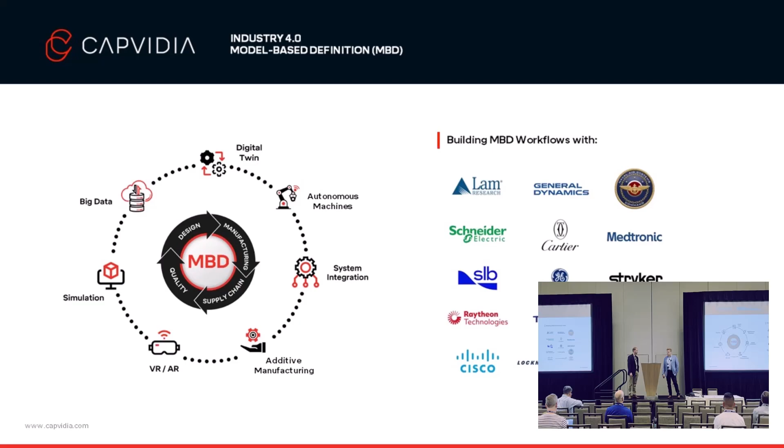So I wanted to start with level setting on some terminology. Again, you heard some of these terms if you were in the prior session, but I think it's good to make sure we're all on the same understanding of what we're talking about here for terms. So we got a model-based definition data set on the right, and we're talking about characteristic accountability. So first, what is a product characteristic? It's a trait, a quality, or an attribute on an element of a feature, and it can describe the size, the location, the form, or some property of that feature.

So on our example part on the right here, our machine block with 4 holes, the product characteristics that we're going to focus on are a feature of size characteristic for all 4 holes, and then a true position on the pattern of 4 holes. And product characteristic tags, so these are human or machine readable tags that are applied to the product characteristics. So for this part, I know the numbers are hard to read, but the feature of size is number 3, attached to that PMI element, and then the true position of the pattern of 4 holes is number 4.

So because it is a pattern of instances, there's a parent ID that's attached to the PMI instance, and then there's instance tags that are applied to each of the 4 holes. So in characteristic accountability, we need to account for the characteristics. So we got to go further than just putting an ID on the parent and assuming somebody's going to figure out which hole is which hole. We've got to characterize each instance so that we can trace them.

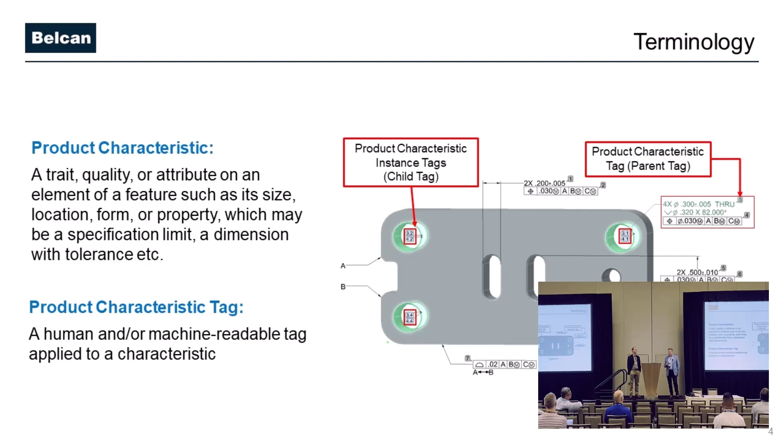Then the next term is a bill of characteristics. So this is a list of all of the product requirements, in this case in an Excel format or a tabulated format. And if we walk through the example of what's included typically in a bill of characteristics, you've got the characteristic IDs or the tags. You have the presentation state, or in NX, that's your model views where those IDs are present. The measurement object, so for that pattern of 4 holes, the measurement object is the cylinder.

The PMI, which in this case is primarily GD&T. We're also referencing the datums and reference frames for that GD&T. We've also got the concept of a UUID, or a universal unique identifier. Those can be applied at the characteristic tag level, and you can also call the bill of characteristics with its own unique ID.

And then finally, what we're here to talk about, characteristic accountability. So that's ensuring all of your product characteristics, the requirements attached to those product characteristics, have been met with traceability through verification results, right? We want that full cycle of assigning the characteristics, mapping them through the manufacturing and inspection process, and then being able to map the results back onto the same characteristics.

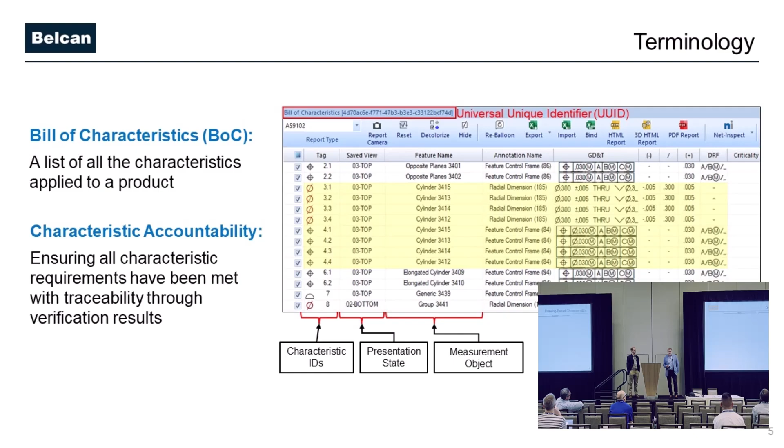All right, so next I'm going to talk about what does characteristic accountability look like today in a drawing-based environment. So if you look at the image on the top of the diagram, I'm going to build out a workflow. On the left-hand side are major process steps that are done by the OEM, and then on the right-hand side are the steps that would be done by a supplier or multiple suppliers.

So we'll start, of course, with creating our 2D drawing. We're going to assign 2D specs. So examples could be weld specifications, heat treat specifications, where the 2D drawing will have a call out, weld per specification, and then you have a stack of specifications that have the actual weld requirements. We'll combine both of those data sets and then issue that product definition to the supplier.

And then what the supplier is going to do as an initial step is characterize the 2D drawing. And that's going to take the form of, you might hear the term ballooning a 2D drawing. Most people use circles with unique numbers inside the circle. And they're assigning a unique ID to every, in this case, 2D PMI instance. They're also going to have to characterize the 2D specs. So again, that can take the form of ballooning the 2D specs. So it's the supplier that is accounting for all the product characteristics in this workflow.

Then they'll take the 2D drawing, balloon characterization, and the 2D specs and combine them to create the bill of characteristics. And often in a 2D environment, that's going to take the form of like an Excel file where a human's extracted the data from the drawing and the specs and manually typed that into an Excel file. So I think the key thing here is the complete bill of characteristics is being created at the tail end of the process, and it's being done by the supplier in this workflow.

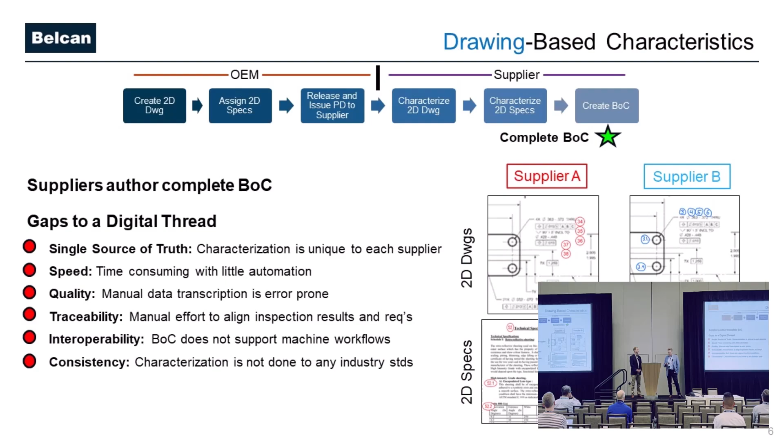So we saw what characterization looks like in a 2D drawing environment. We're gonna see what it could look like in model-based. And just to transition that conversation, this is how we talk about at Belcan the data elements that make up a model-based definition data set.

You've got the geometry, that's the shape definition. Annotations, which can be GD&T and notes. If you drop to the lower left, attributes and parameters, that's the metadata. That's behind the scenes on the PMI. Presentation states are model views in NX. That's where you're telling the story of the part across multiple model views.

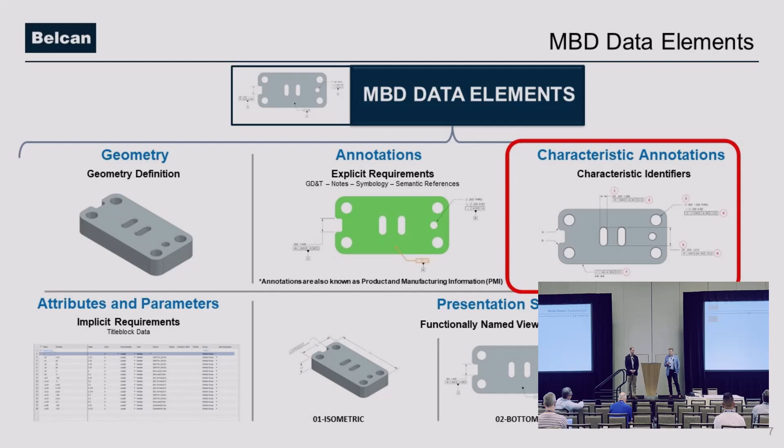And then we spike out characteristic annotations as a separate data element because there's so many workflows that can be driven off of it. All right, so same construct as two slides ago. Let's see what this workflow looks like with model-based characteristics. So instead of creating a drawing, we're going to create an MBD data set. We still have to assign 2D specifications, like those weld and heat treat callouts.

And then the red box is where we're going to see new process steps that are going to show up on the OEM side of the workflow here. So we'll start with characterizing the model-based definition. It's the same parent and instance IDs that I showed you on the previous slide. We have the opportunity to characterize the 2D specs in engineering. There's software available to complete that step. Capvidia is one of the providers in that space.

There's also the opportunity to merge the 2D characterization and the 3D data set to get a complete BOC as part of the engineering definition. We don't have details of that in this process, but Daniel and company, I'm sure, would be happy to show you what their software can provide for that workflow. And then lastly, we've got the opportunity to create a QIF file. That's our machine-readable format that's going to carry our characterization.

So we take all of that data now, authored by engineering, we release our data package to the supplier, and the ask to the supplier is that they reuse the OEM characterization. So now comparing to what we did in the drawing-based world, what happened here? We've moved that characterization to the left, made it part of the engineering definition, and it's a complete BOC authored by engineering.

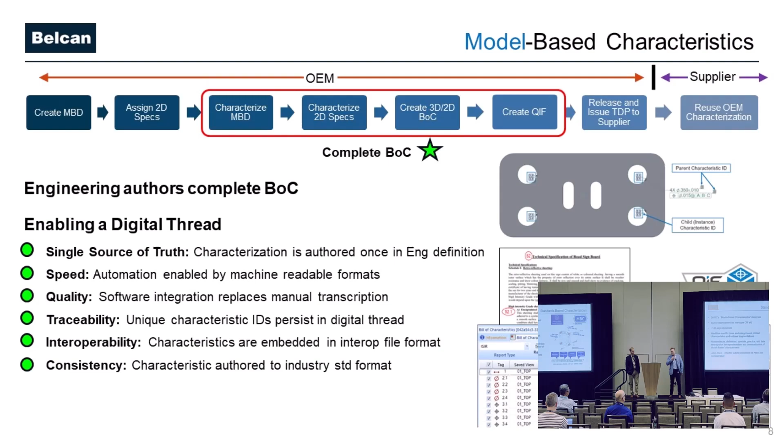I'll ask the same question here. Is anybody experimenting in this space of seeing what characterization could look like for MBD? Got some head nods, so there's some hope. Keep it alive. So I'll cover the first standard that's in this ecosystem, and it's an emerging standard. It was referenced in the prior presentation. The DMSC, the Digital Metrology Standards Consortium, the same group that controls the QIF standard, has authored this document.

It's about 180 pages, and it's got the specific types, categories of product characteristics, and augmentations, like criticality is an example of an augmentation. It's got nomenclature, definitions, symbols, and practice. In June of last year, they voted that it should move forward to be considered as an ANSI standard. I think the latest status is to get that approved in Q4 of this year, is what they're tracking.

So my message here is if you're going to get into the space of putting characterization in your data sets, rally around this standard. It's going to help with adoption. It's going to help software vendors focus on where they can drive automated solutions off of this standard. On the next slide, I'll hand it over to Daniel. He's going to pick up with the QIF standard and show how QIF can be used in pretty powerful workflows on the consumption side.

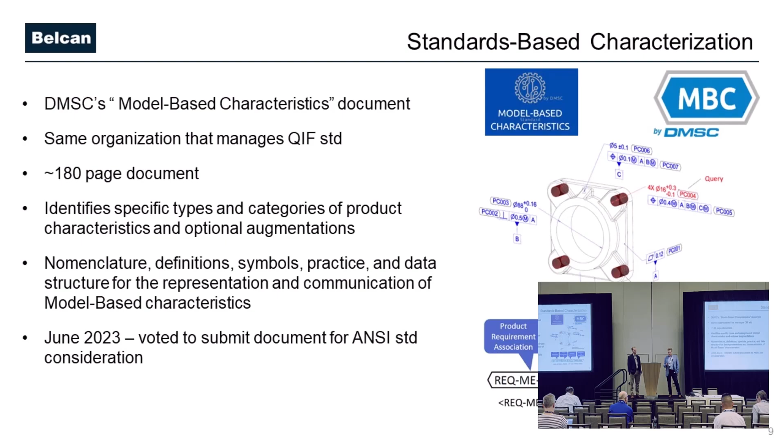Yeah, so the QIF standard, it's the Quality Information Framework is what it is. We've probably heard a lot about it.

This is also governed by the Digital Metrology Standards Consortium. I'm a member of the board of directors of the Digital Metrology Standards Consortium, and I actually chair the QIF working group that's working on the next future version of the QIF standard, version 4.0.

So the point of QIF is it's a data format for storing PMI information and then also a lot of quality-related metadata. Most notably, we're talking about the characteristics that are on a part and then measurement inspection results. So it's a feature-based sort of data language, which means that the fundamental core of QIF is built around the idea of features and characteristics. So at the end of the day, that's what you have on your MBD model: you have characteristics which are governing or controlling certain features on your part. That's what it boils down to.

It's built using XML, which is a big advantage from the QIF side because it means that not only can professional software vendors like Capvidia come out with software that uses QIF, but actually it becomes very common for end users to be using QIF, to throw it at some of your data scientists. They could use Python to easily go in and extract data and do your own data manipulation, which is especially powerful when it comes to results data.

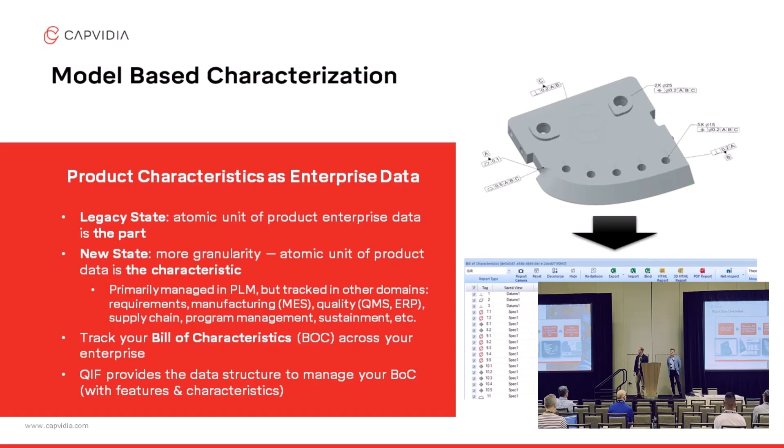So let me get into an example of a workflow. One of the nice things about where we are now in terms of model-based definition is we can get away from just slides, just PowerPoint slides like we were just showing, and we can show some real software that's really doing some really cool things in the area of model-based definition. These are real workflows that we're working with active users.

So what we're going to see is we'll start off by characterizing our model in NX. So that's our product definition, we have our PMI there. We're going to break down each of the characteristics that we see on this very simple little widget model. From there, we'll generate a QIF, and we'll break down the bill of characteristics - we'll generate that bill of characteristics and visualize it there inside of the Capvidia MBDVidia software.

From there, we'll go to PCDMIS, which is one of the major CMM programming tools out there, and we'll author a CMM program and execute that. And then finally, the results that come out the back end, we will have traced that digital thread all the way through, and we can link those results all the way back with the model that started the whole process in the first place. So starting off here.

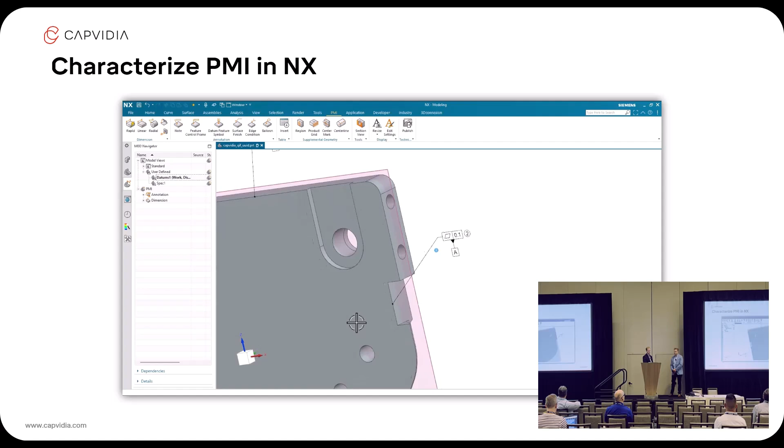On the NX side, so we have our product definition. So what we see is just a few simple tolerances on this little widget part. But notably what we see is we can see the balloon numbers here. So this is often a somewhat revolutionary way of thinking about authoring your product design, is ballooning the actual design model.

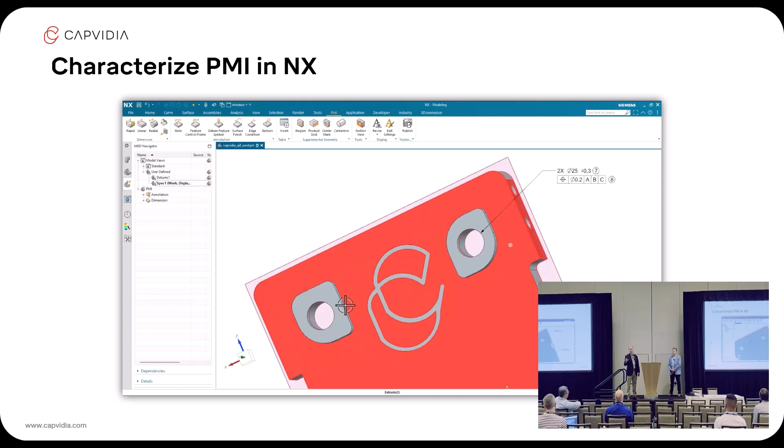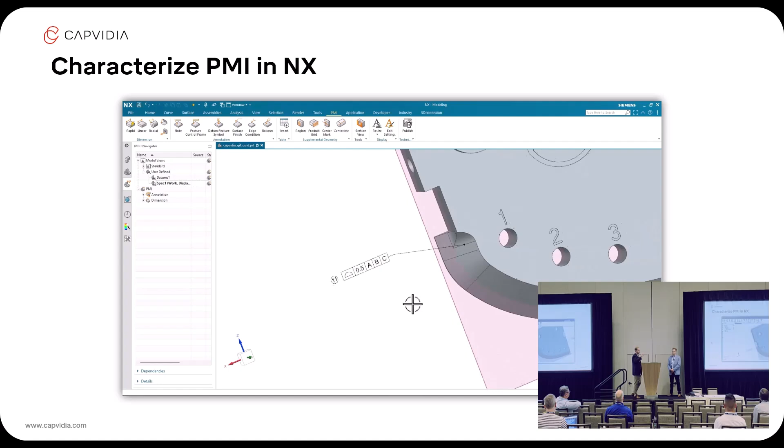Anyone doing this right now on any of your data? A little bit, okay, yeah. So it happens, but it's not the norm for most people.

But that's the way industry is moving. Like Mike was saying, this idea of pushing left the process of understanding what your bill of characteristics is - and again, why is that important? The designer is putting the annotations on the part because you need certain inspections done. So implicitly, whether that person knows it or not, they are creating a bill of characteristics. So what you should be doing instead is make it explicit. That PMI that you're putting onto the part, it should result in a specific bill of characteristics - that's the whole reason you're putting PMI in the first place. So that's our starting point, the characterizing of that part inside of NX.

So next, we'll take that NX model. We're going to generate a QIF model, which is a derivative model. It looks exactly like the NX model in terms of all the annotations and the presentation states, and we'll characterize that, and we'll view that bill of characteristics.

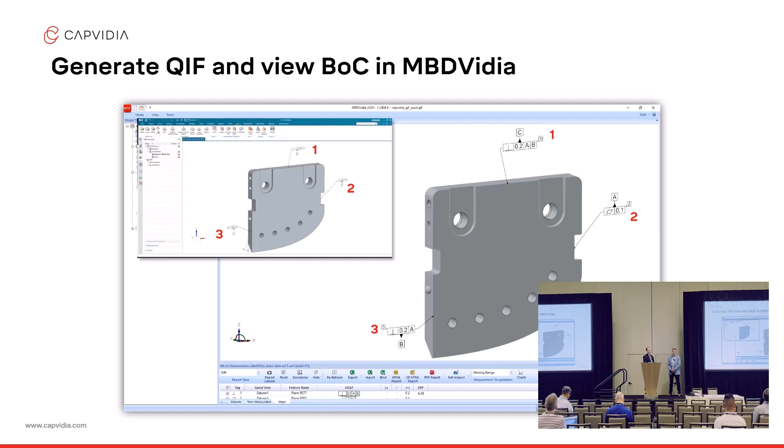So here we are - this is actually the QIF model we're looking at here. And what we'll be able to see is we bring up this bill of characteristics that's going to be brought up here on the bottom. And we can see how we have balloon 1, 2, 3, and here we have the matching balloon numbers there on the QIF side. In other words, maintaining those same characteristics now through a derivative file that can be sent throughout your enterprise, throughout your supply chain.

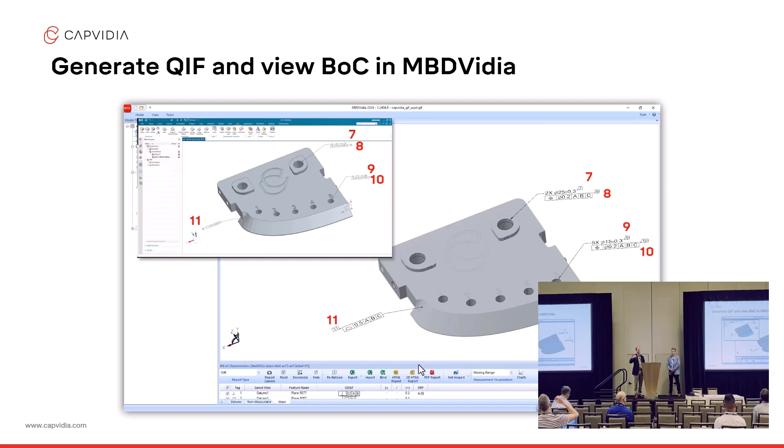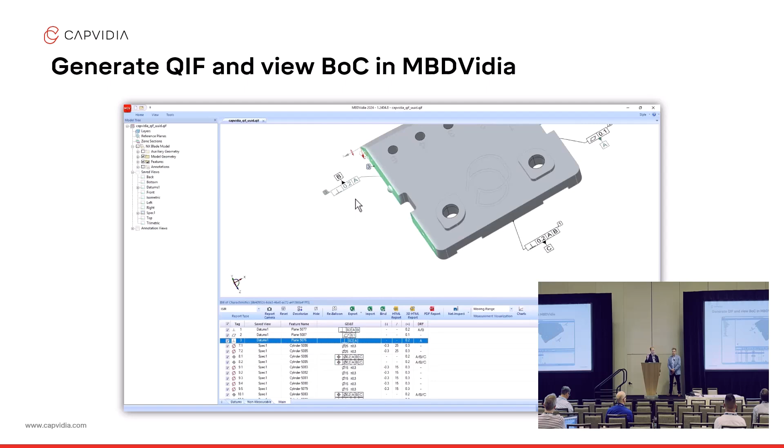And here on the bottom, we view this panel called the bill of characteristics. It's just all your PMI broken down into a tabular format with all the characteristic IDs and a breakdown of all the semantics of it. This is a perpendicularity tolerance, this is the tolerance value, these are the datums that control it, and so on.

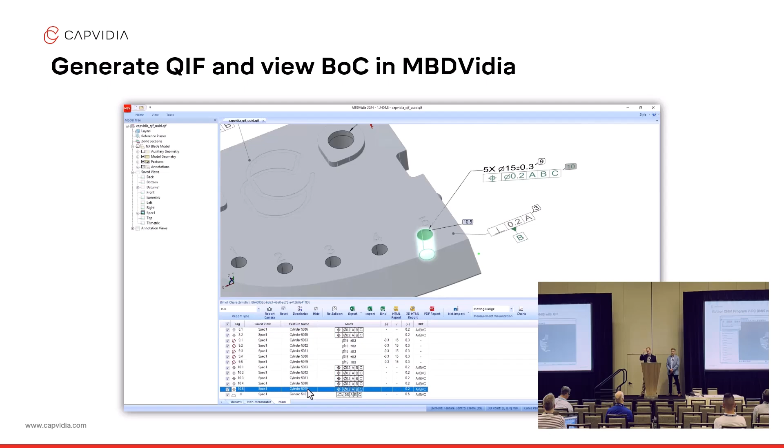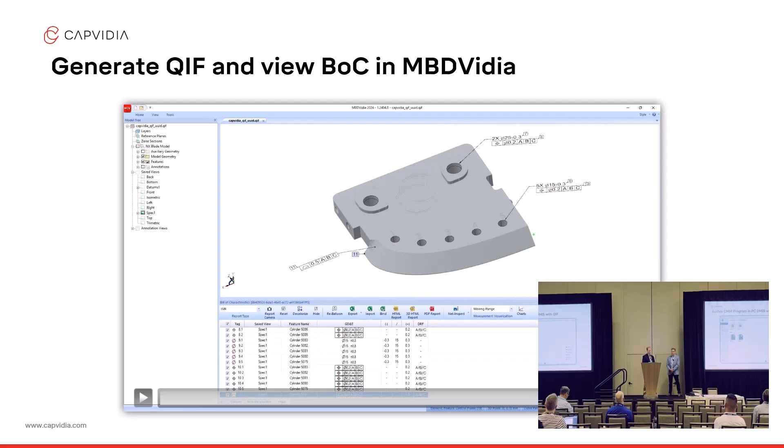So now we've established our bill of characteristics, we're ready to go out and do a CMM inspection. So we'll take a look at PCDMIS. This is a popular CMM software that supports QIF. It's not the only one out there, but it's a popular one, so I thought it would be a good one for this video. Probably a lot of you are using PCDMIS. So what we're going to do is we're going to pull that QIF file into PCDMIS.

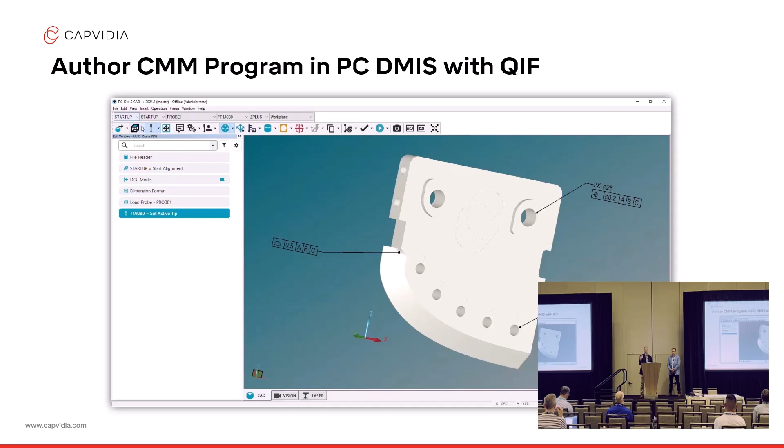And what we're avoiding in all of this is the process of having some poor quality engineer looking at a PDF and typing this data into their software, which is ridiculous when you think about the fact that this is how we have to do it. So we pull in all the MBD, all the PMI, but additionally what's being maintained through this QIF file is...

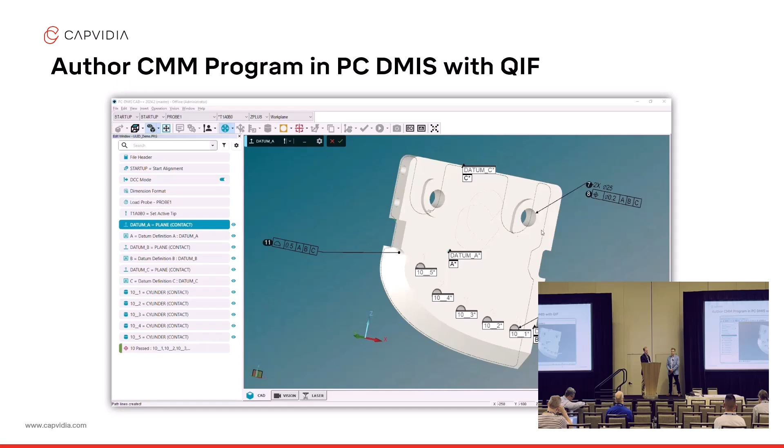...the notion of the characteristics. So you can see it here, this little black balloon next to each annotation, that's the original characteristic ID that was established in NX. So here we are now through quality inspection, and we can see that digital thread being maintained at a characteristic level all the way through the CMM side.

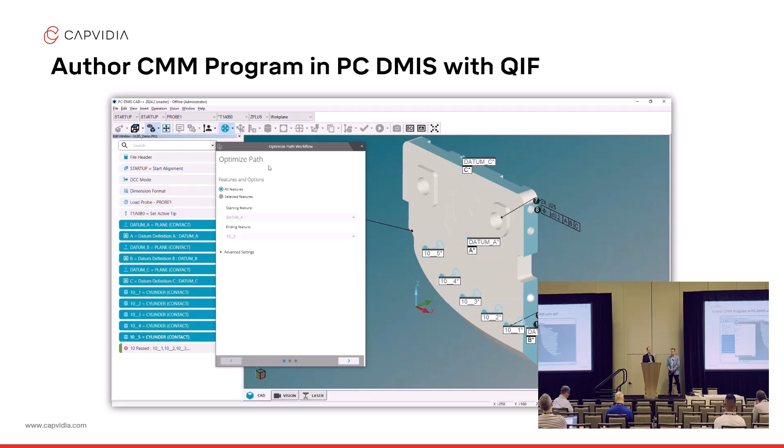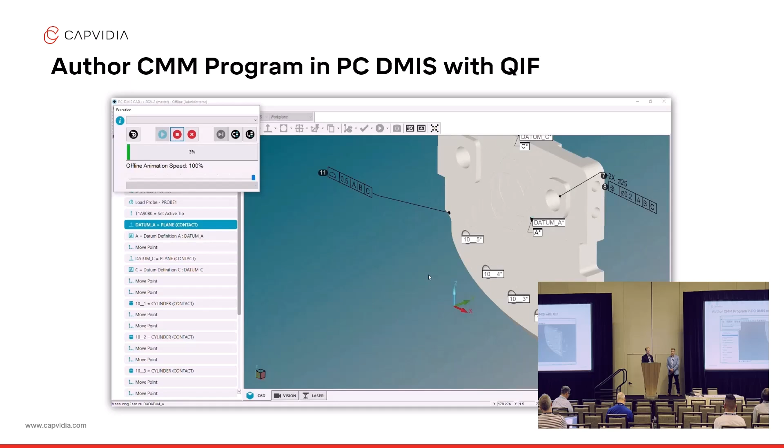So it's going through, it's creating an optimized CMM path based on the PMI that's in there. And then we'll see the beginning of the simulation of the inspection. We'll see the probing system running around, carrying out the inspection, and so forth.

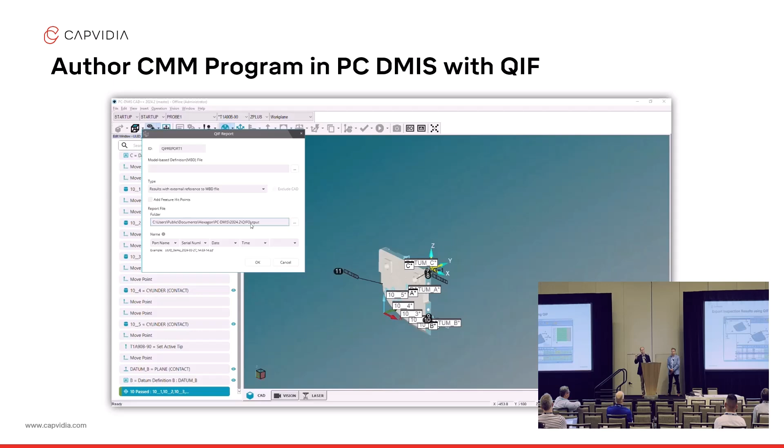So there we have now, we've created a CMM inspection based on our starting point of the NX PMI and the characteristics. So the final stage that we'll look at is exporting those results from PCDMIS, again in the QIF format, and we'll show how that link of the results is maintained, and we can view the results from that inspection back on the model.

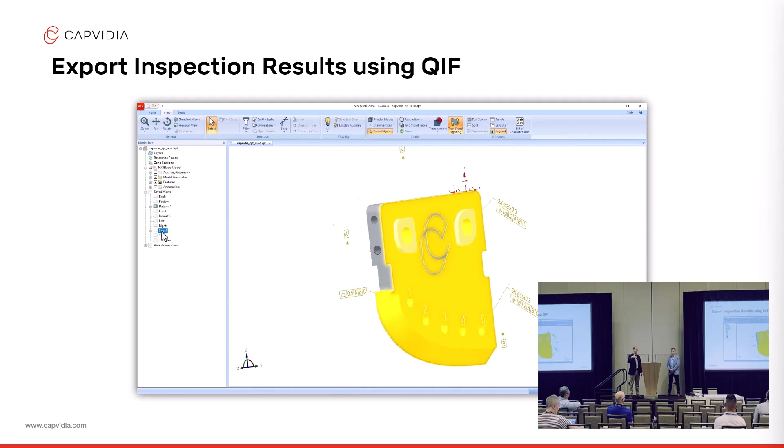So here we are again in the MBDVidia software from Capvidia. We see that bill of characteristics, and we're going to insert the QIF results that just came out of PCDMIS. So down here we can see the inspection data pulled in. These are the results: 10 different serial numbers, 10 different parts were measured, and so we have the results from 10 different parts. We could do all kinds of statistical analysis of these results and so forth.

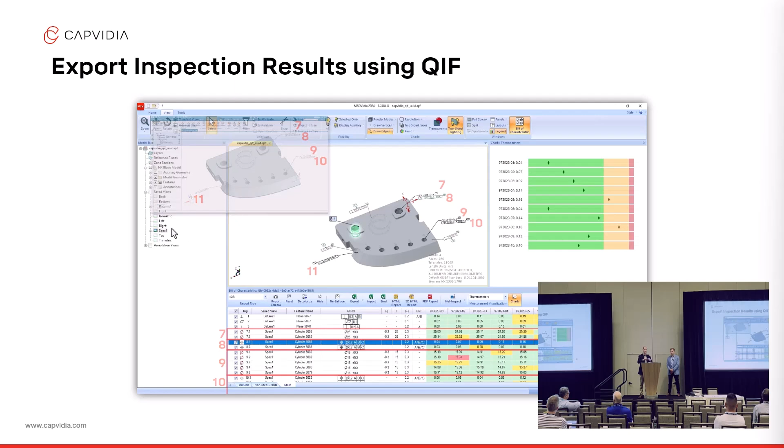But what we're going to look at is how now we have the characteristic authored in NX, the characteristic in QIF that we use to create our measurement plan, and then finally the results coming back in from PCDMIS from 10 different parts, and it's all linked, sort of maintaining that digital thread from front to back.

And again, the cool thing here, this is real software. This is not just a PowerPoint concept. This is real software, and there are people out there doing this right now.

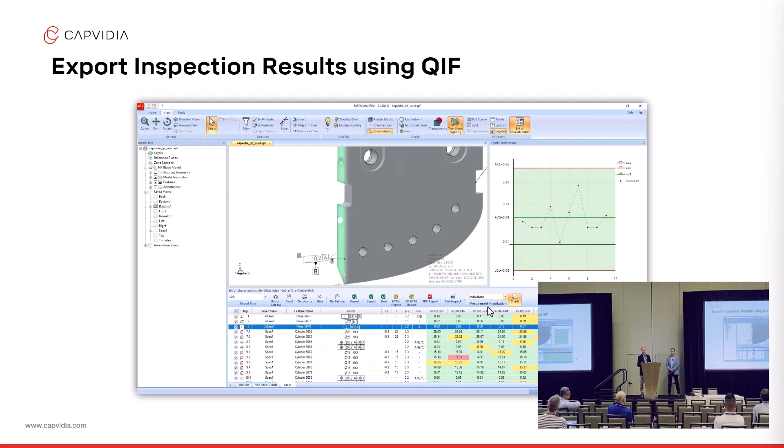So again, starting in NX, authoring that PMI, authoring our characteristics there, flowing through QIF, understanding our bill of characteristics, authoring programs in whatever your CMM software of choice is. In this case, we were looking at PCDMIS. And then finally, tracking those inspection results, maintaining the thread of that characteristic so that we could tie back all the way to that characteristic which is authored in NX.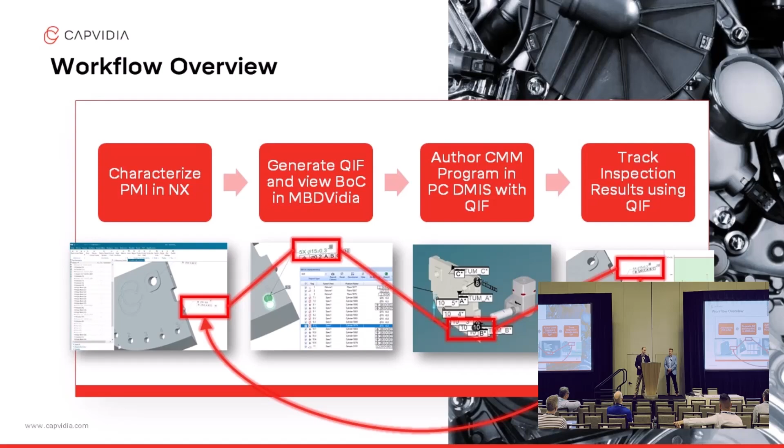There's the last slide that I wanted to show, so for those of you that were in the previous talk, you saw this slide. George Rendell was talking a little bit about the Siemens vision for how characteristics fit throughout the entire Siemens ecosystem of software. And these are not just some crazy ideas that Mike and I are throwing out there in terms of characterization. This really is the way industry is going, and Siemens has a very, very clear vision, I think, of how characteristics can be managed throughout the entire life cycle, starting from NX.

So I think, yeah, it's exciting to see industry really moving in this direction and getting some clarity in this area.

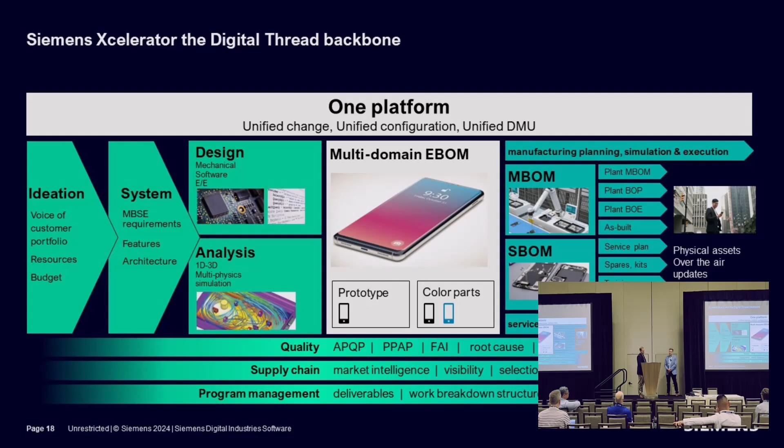And with that, we'll just take it to some conclusions. So I'll take the first one.

First is just thinking about model characteristics as business objects. It takes a little bit of a change in thinking, but I really want to encourage people to start thinking about model-based characteristics, or even your drawing characteristics, as important business objects that you need to track throughout your entire enterprise. That's a new way of thinking, but it's an important one.

It's really enabling a digital thread through the supply chain. The next thing I would say is this is not pie in the sky thinking here. We're beyond the level of just high-level PowerPoint presentations and a lot of hand waving. We have real software out there that could do these things. So it's time to get your hands dirty and start running with your MBD implementation. Now's the time to do this.

And last, I highlighted in my slides that MBD and QIF can reduce manual data entry, but what we're really talking about here is supporting a digital thread. I see characteristics as the spinal cord of a digital thread - you have to have it, you have to establish it early, and it has to be traceable.